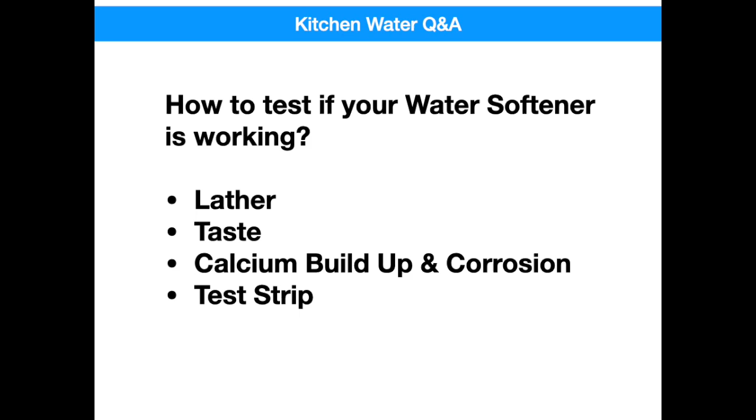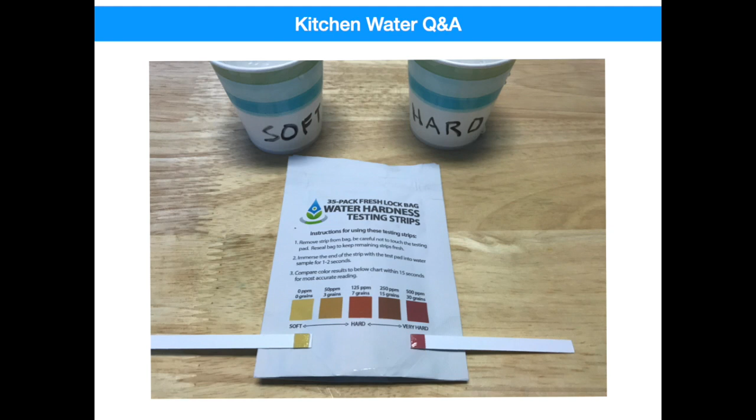The best way to truly test if your water softener is working effectively is to use a water hardness test strip. Just take a hot water sample from anywhere in your house, dip a test strip in for about a second, and check the results against the water hardness chart on the package. The results should be 0 to 2 grains per gallon of hardness, preferably 0.

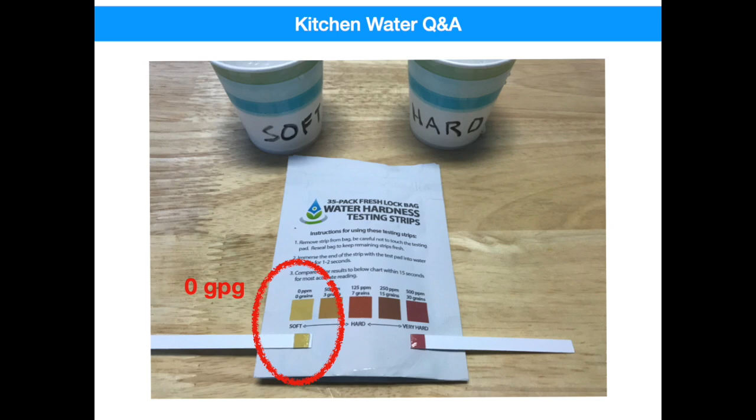If your softener is higher than this, verify it has adequate salt in the salt bin and the hardness setting is between 14 to 16. Perform a regeneration. Let the hot water run for a minute or two, and then test the water again. If it's still not anywhere near 0, you should have your softener inspected by a professional.

If you rely on your water softener, it's not a bad idea to have water hardness test strips around the house. You can get them at a local pool store, or buy them online. Just be sure to keep them closed up when you're not using them.

The second part of this question is about water spots on dishes washed in the kitchen sink. In Trilogy, most of the homes were plumbed with the water softener going to the kitchen sink's hot water line only. This is to protect the dishwasher and its parts from corrosion.

The kitchen sink's cold water line does not use softened water because it's what would be used for a future reverse osmosis system. So if you're hand washing dishes with the faucet's cold or warm position, you're actually using some hard water, which can result in spotting. Try either using just the dishwasher or the faucet's hot water position only to see if your spotting problems go away.

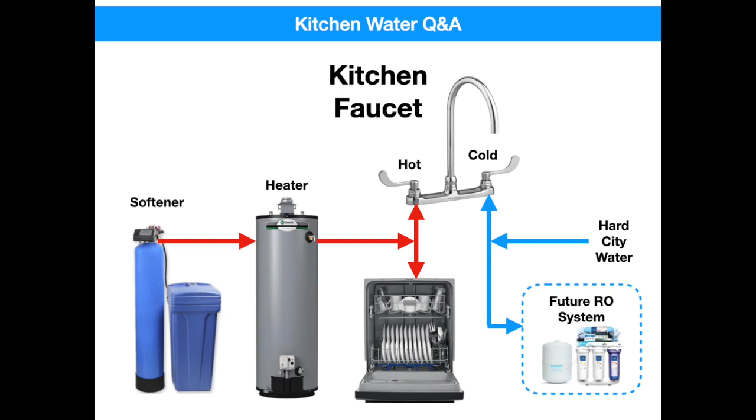The next question is: I've changed the filters on my reverse osmosis system, but I still don't get the flow out of the RO's faucet like I used to. Do I need a new system?

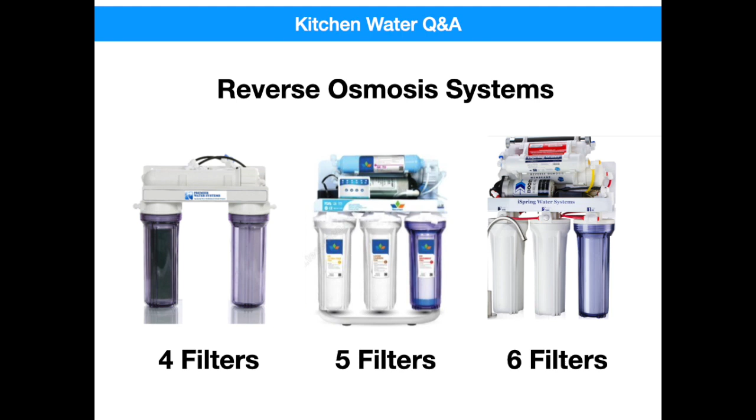It's true that the filters provide resistance to water flow, even new filters. RO systems can have as many as 4, 5, or 6 filters. With so many filters, you're lucky to get any flow at all.

To fix this problem, manufacturers provide a storage tank to provide an instantaneous supply of filtered water. The water slowly fills the storage tank as it's filtered, so it can be available on demand. But once the filtered water gets in the storage tank, how does it get out? The storage tank has a rubber bladder, or diaphragm.

As the water enters the tank, it stretches the bladder, similar to compressing a spring. When the water is called for, the stretched bladder pushes the water up and out of the tank. The problem is that the bladder loses its energy as it loses its stretch.

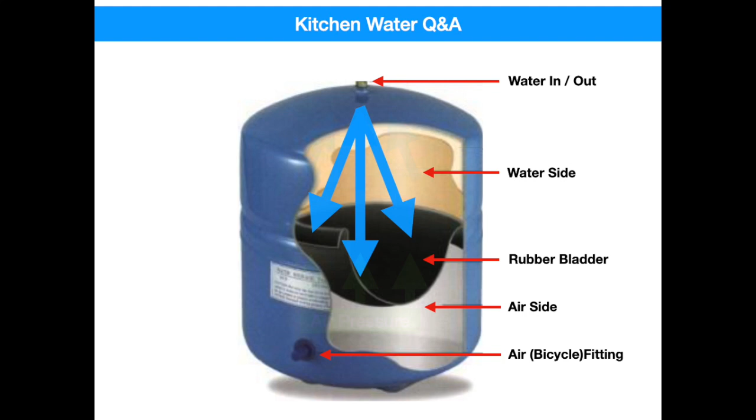To force all of the water out of the tank, manufacturers use compressed air behind the bladder. As clean water enters the tank, it stretches the bladder and compresses the air to provide significantly more force to push the clean water out of the tank.

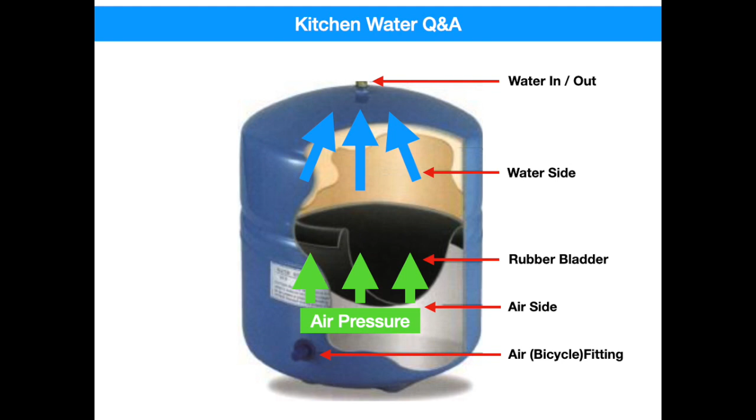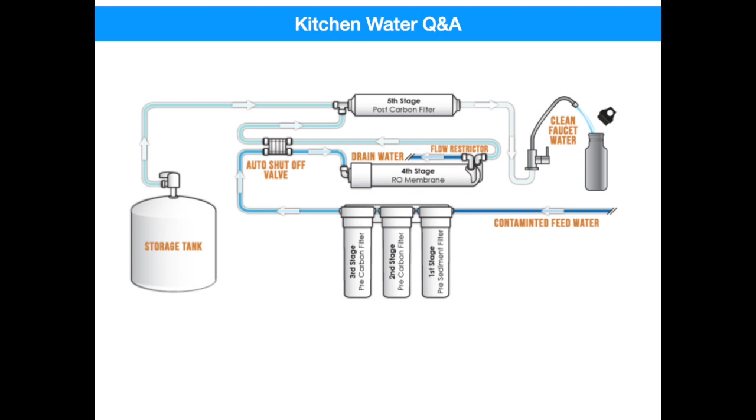So the condition of the filters determines how fast the water recharges, but the faucet's water velocity is more a function of the storage tank's ability to hold an air charge.

Now, in answer to the question, do you need a new system? The answer is no, but you might need a new water tank if the air is leaking out or past the rubber bladder. If you want to test your air pressure yourself, it's not that difficult.

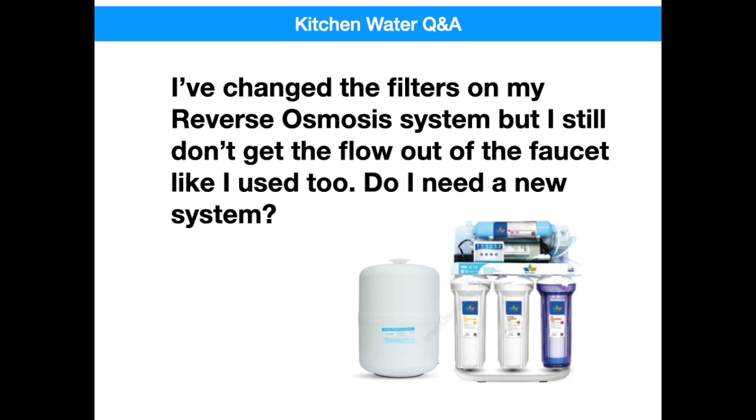All you need is a pressure gauge, a small compressor, or even a bicycle pump to recharge your storage tank. Here's what you do: first, turn off the water to the reverse osmosis system.

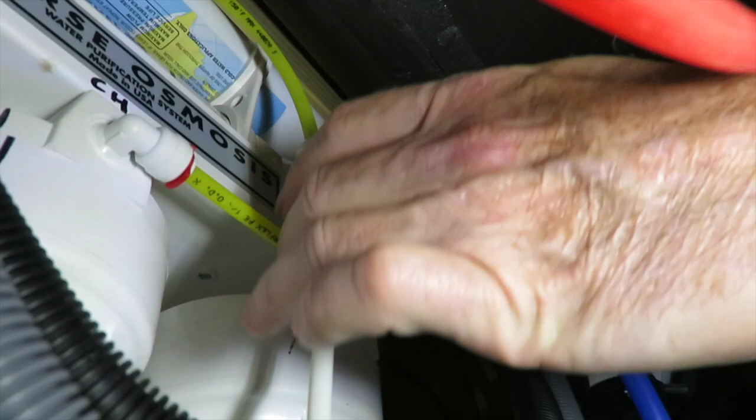Using the RO's faucet, fully drain the pressure into the sink. Leave the faucet open because more water is going to be forced out when we charge the tank with air. Then check the pressure in the tank.

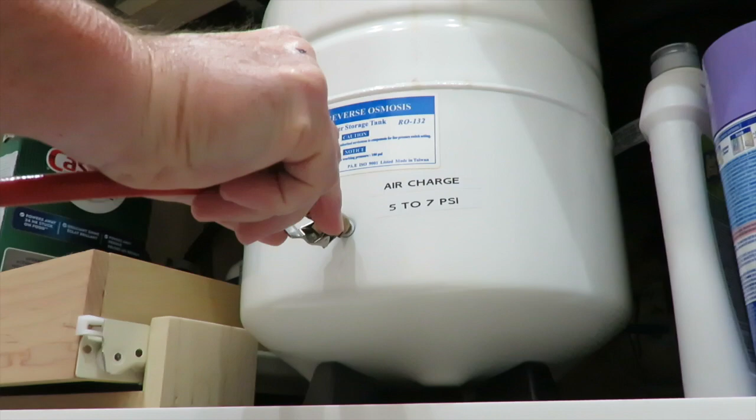You can add air to the tank just like a bicycle tire. You typically want 5 to 7 psi in the tank when you're done, which is about 3 to 5 pumps with a bicycle pump. You can verify this with an air gauge. If you need more help, check out YouTube, which has several videos that'll walk you through this.

Remember, when you turn the water back on, it may take up to an hour to completely refill the tank with water and completely compress the air.

The last question for today is, if my refrigerator gets its water from my RO system, do I really have to buy one of those expensive refrigerator filters? The answer is absolutely no.

You don't need the expensive refrigerator filter, and removing the filter will not only save you replacement costs, but it'll improve your water pressure, resulting in faster flow. Now the question is, can you actually do it?

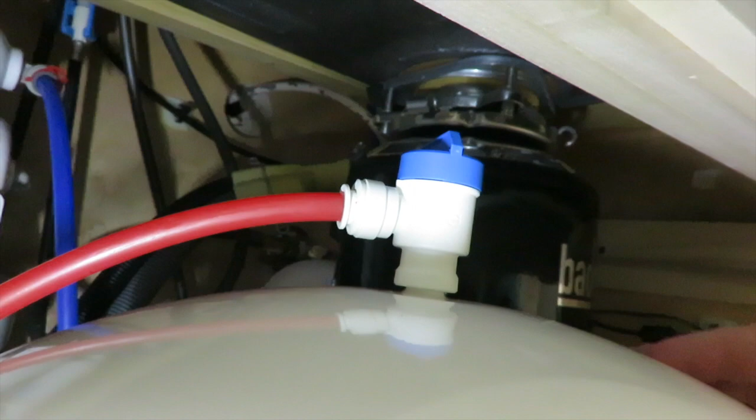First, let's see if the water that goes through your refrigerator is actually going through your RO system. It's easy. Simply close the valve on the top of your RO storage tank and fill a big glass of water from the fridge. If it now fills at a slower speed, your fridge is being supplied from the RO system. If the water still comes out at the same rate, it's not. Check it out and see if this happens to you.

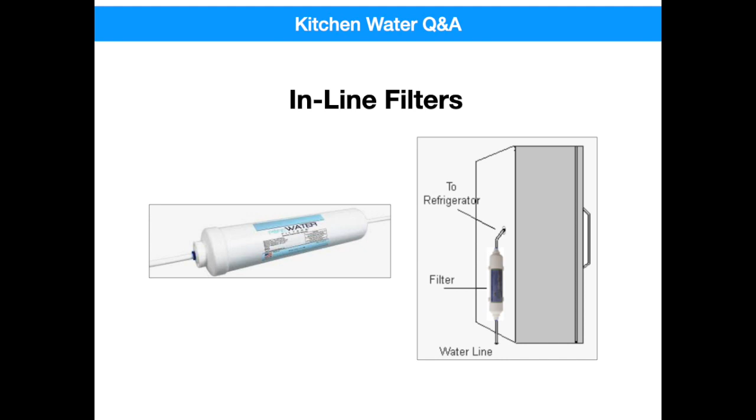Now, whether you can eliminate the filter depends on the design of the filter. If you have one of those simple inline refrigerator filters that sits behind your fridge, you can just remove it and connect the hose back to the refrigerator and you'll be good to go.

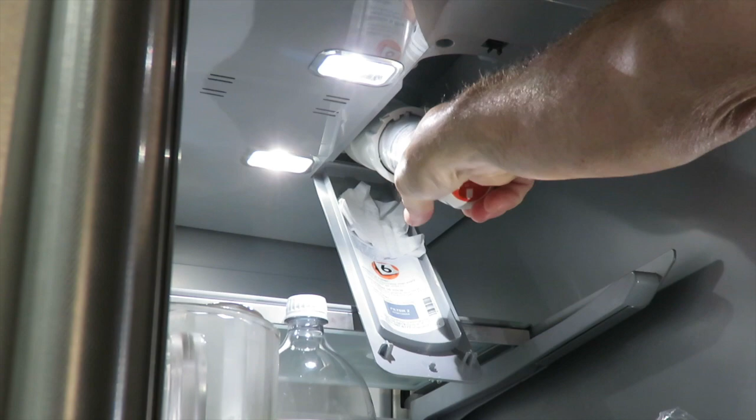If your refrigerator was made with a built-in filter, there are 3 directions you can end up taking. Before we go any further, open the RO storage tank valve again to supply full flow to the refrigerator. Find and remove the filter. Follow the user manual's instructions if you're unsure, and have a towel handy to wipe up any drips. Once the filter is removed, fill a glass with water and observe the flow.

Some filters are automatically bypassed when the filter is removed. This is the easiest option. If you get full flow, you're good to go.

Some filters can be removed and replaced with an optional bypass plug. These plugs are about 20 to 40% the cost of a new filter, and once you install them, you never have to make another purchase. To see if your refrigerator has a bypass plug available, search on your refrigerator's model number and the words filter bypass plug.

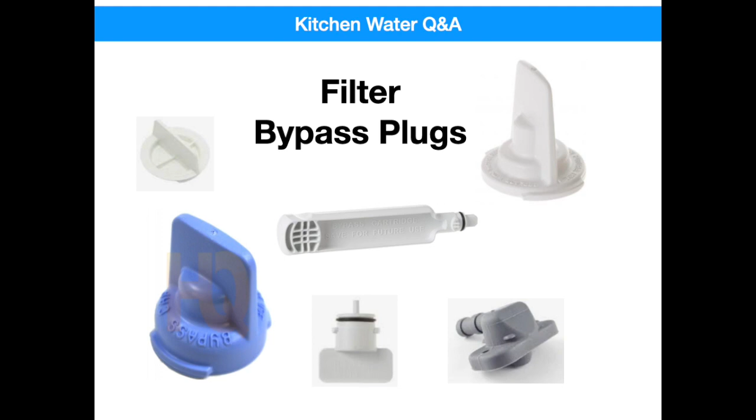If you can't find one online, don't give up yet. You can always call an appliance parts store and ask them to do the research for you. If the plug is available, great. If not, you've pretty much run out of options, and it looks like you'll be writing some checks in the future for some new refrigerator filters.